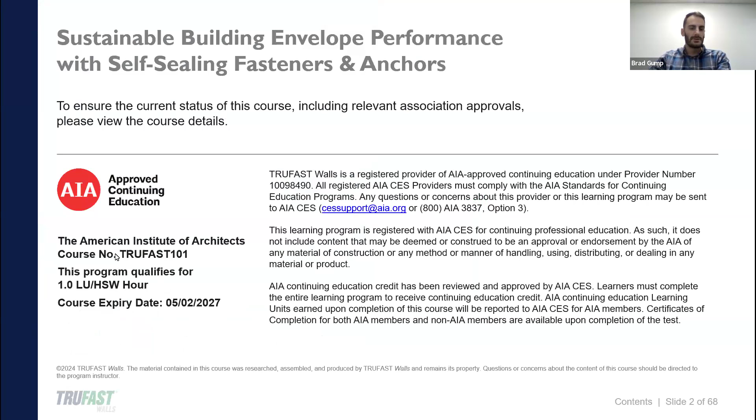The purpose and objectives for this CEU course today: sustainable building envelope demands high performance from proper installation of continuous insulation, and air, water, vapor, and control layers. So we ask a couple of questions. What happens when thousands of holes are made in these materials with blind fastener penetrations? The sequencing of these layers, how does that differ between subcontractors? How does that differentiate what products are used to install each layer? What sequencing issues can be avoided, and when can they not? We'll focus on how self-sealing fasteners can be used as a solution to these issues and help mitigate potential damage or inefficiencies in these types of systems.

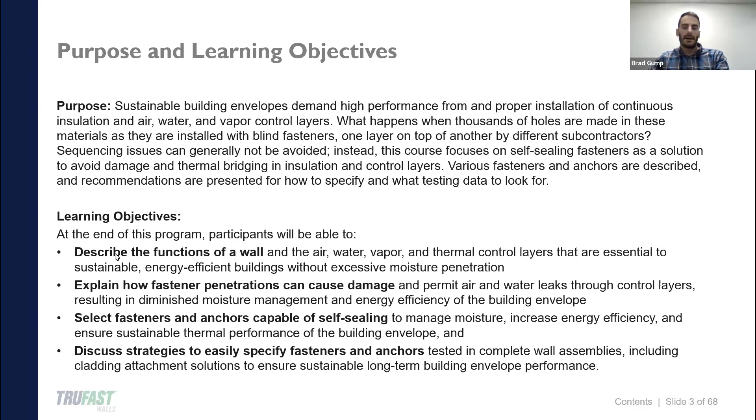The objectives we have today: at the end we would like participants to be able to describe the functions of the exterior building envelope wall, the air, water, vapor, and thermal control layers that are essential to these walls. Explain how fastener penetrations cause damage - they permit air and water to leak through control layers, resulting in diminished performance, whether through mold, rust, or decreased energy performance. Which fasteners are capable of self-sealing? What is the correct product to use if you want to manage moisture, increase energy efficiency by reducing thermal bridging, and similar things. Then we'll discuss strategies to specify these fasteners - how can I find these, how can I plug this into my specification and make sure on the job site that they are getting the correct product?

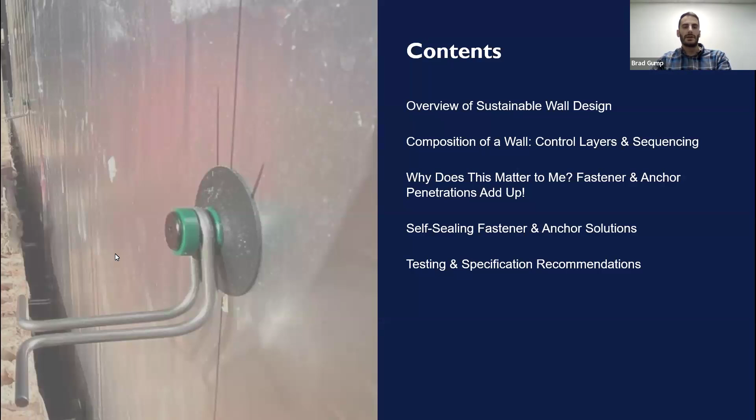So the contents: what we're going to go over is an overview of a sustainable wall, what we believe that looks like, composition of the wall, the various layers from the studs outboard. Why does it matter to you? Why should you be concerned about these fasteners and the penetrations? Self-sealing fasteners and anchor solutions - what is available in the market. And then the testing and specification of these particular anchors to make sure that they're actually doing what they say.

Walls serve three primary purposes. The most important function of all is structural. Structural support means that the foundation is able to support the structure's weight, and the walls are load bearing - that would be dead weight, so the structure can support gravity, it can support the roof over its head. Then we've got dynamic loads - live load is what that might be called. So that could be snow, seismic events, wind, rain, occupants, other things inside the building.

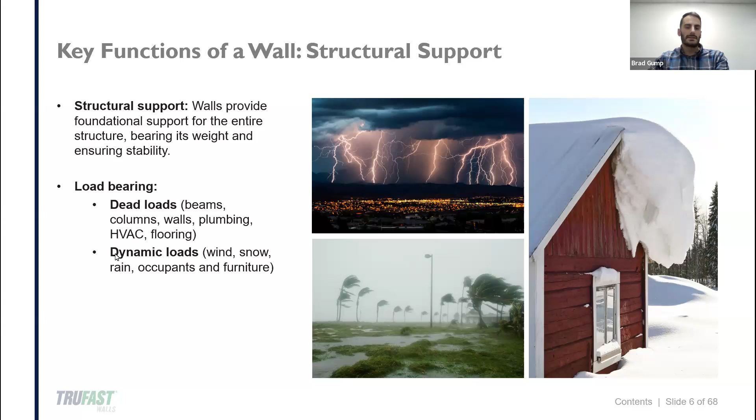The second key function of a wall is climate control, or energy protection. We use a lot of energy both heating and cooling our homes. The building envelope protects occupants and contents from the elements, and ensures that this conditioned air, whether cooled or heated, remains inside and is not able to escape, causing more use of energy, whether that be fossil fuels or electricity. Basically, it serves to keep the inside inside and the outside outside.

Also closely related to the wall's function to maintain climate and energy use is managing moisture. Water is a relatively damaging substance when you think about it. If it gets inside, it can rot wood, rust metal, it can do all sorts of things. So one of the key benefits of the wall is to keep air and water out. A properly constructed wall is one of the key aspects of sustainable building as well, helping to conserve energy while providing occupants comfort and healthy indoor air quality.

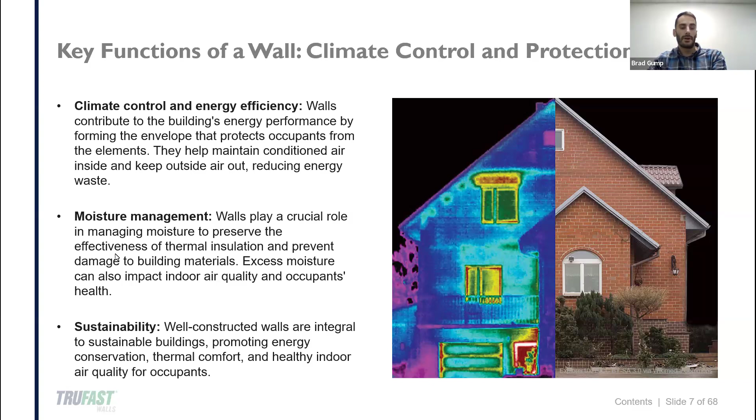And the third key function of a wall is design. This is purely for aesthetics, and it can do a vast majority of things, whether that be cultural identity, character, or just looks. People enjoy looking at buildings that are pleasing. They feel good when they see things that are aesthetically designed. These things can show the personality of architects and of the people that live in these cities, and show tradition and modernity. It's a cool way to express local personality.

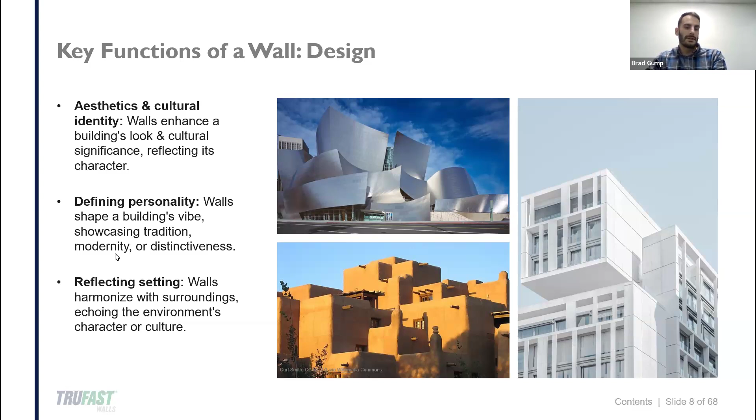So what are the essential components of a wall? I'm sure some of you are familiar with Joe Lstiburek, legendary building scientist. He came up with what he called the perfect wall. This wall consisted of a structure - that would be your studs, whether wood studs or steel studs. It could be like a CMU backup, something to support the loading of this wall.

The second would be the control layers - that could be for water, air, thermal, vapor. Think about your air and weather barrier, an air barrier, thermal insulation, things like that. And then the final layer would be the cladding. The cladding serves a variety of functions - that could be aesthetic, so it's the look, and it also serves to shed bulk water away from those control layers.

It is possible that some of these layers can be combined into one. So you might see your sheathing layer, your control layer be insulation. It could be the sheathing, and it could be the air and weather barrier. There are some products that will do multiple things and integrate into one.

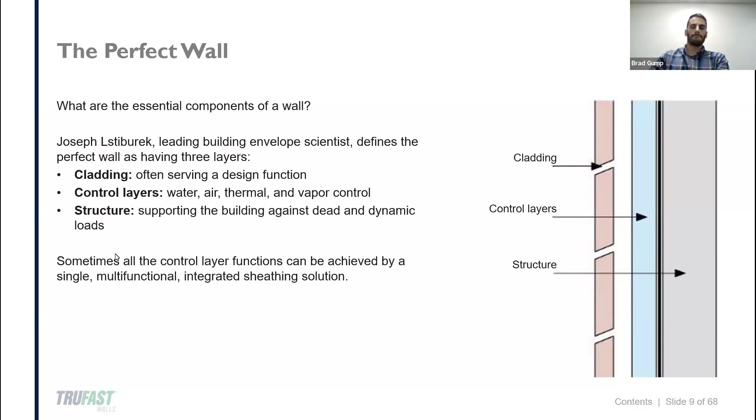Now we're going to break it down a little further, the way these multiple layers are sequenced - a lot of times there are multiple individual control layers. I'd say the most common assembly we see is going to be steel studs. You could have some sort of gypsum sheathing, you might have a sheet-applied or peel-and-stick air barrier over top, then you're going to have some form of thermal insulation - that could be polyiso, XPS, mineral wool.

You're going to have a cladding support system that could come in many forms, like a metal hat channel. It could be lath for stucco, it could be wood strapping like a 1x4. And then some sort of cladding is attached over top - it could be vinyl siding, brick, ACM panels, stucco.

What you might notice is that there are a lot of complex variables. You look at all these materials - are they compatible? How are they installed? What are their weaknesses? There are just so many complex options. You either think about it, there's hundreds and thousands of permutations of materials, manufacturers, and installation. So it's really something we have to be cognizant of when designing walls, to make sure the products we're using together are compatible.

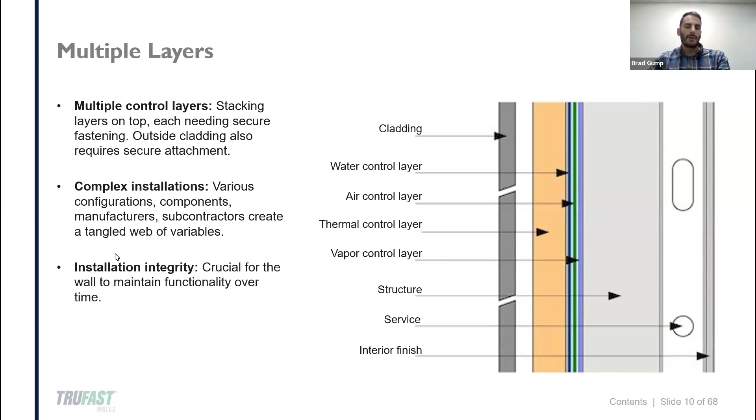So, fasteners and anchors. As a fastener manufacturer salesperson, we often find that fasteners are an afterthought in a lot of cases. People know that they need the insulation, they know that they need the barriers, but oftentimes they don't go so far as to think how the materials are attached and what the proper fastener is. This is a detriment in a lot of cases because fastening is very necessary.

It's something that you need to attach these layers, and if it's not done in a thoughtful way, if the proper products aren't used, you could cause damage to the structure and potentially the long-term health of the occupants. So they securely attach all these components to the wall, but unfortunately they do bring challenges, because a lot of these materials are designed to keep air out and stop thermal energy from conducting through the building, but they're creating holes - we're creating thermal bridges. So even though we're attaching this insulation structurally, we also have to be concerned about these thermal and moisture disadvantages.

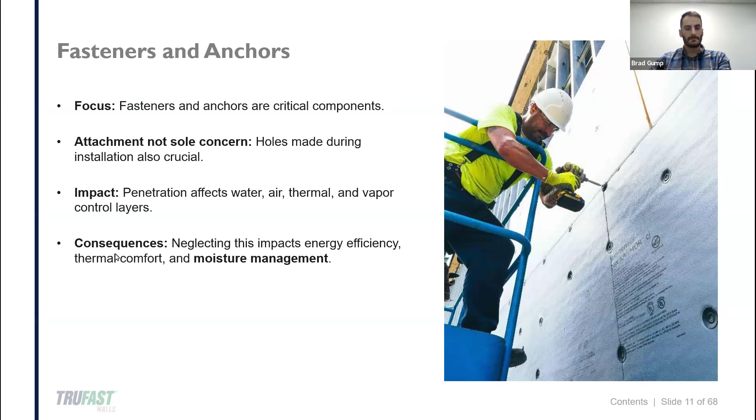So let's talk about the impact of moisture in the construction industry and how much of a problem it is. We've already noted moisture's impact on buildings - that can come in the form of rust or mold, degrading wood substrates, and also the health of occupants. If you have mold, obviously that is not healthy for humans to breathe in long term, so it's just adverse for humans.

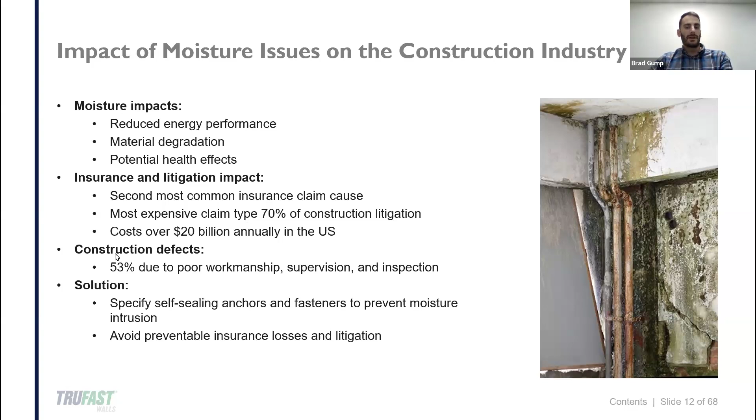So we have to make sure that we're mitigating water. Moisture issues also have a huge impact on insurance claims and litigation in the construction industry. Researchers found that water is the second most common cause of property insurance claims, and it is the most expensive type of claim, accounting for about 70% of all construction litigation and costing the US about $20 billion annually. The data also suggests that poor workmanship, poor supervision, and poor inspection of trade contractors during construction is the source of about half of these defects - people not paying attention, not using the right products, not taking care when doing these installations. So it's all very preventable. Specifying the correct anchors and fasteners is a way to help protect these penetrations, prevent possible litigation, and prevent moisture from infiltrating the building.

So that's a problem. What happens when the contractor shows up next and attaches this insulation over top of this otherwise perfectly installed air barrier? Whose responsibility is that? The air barrier contractor could install this material to a T, and then the insulation contractor says, well, it's not my job to maintain that, I need to attach the insulation. So who's on the hook for that? Whose problem is it?

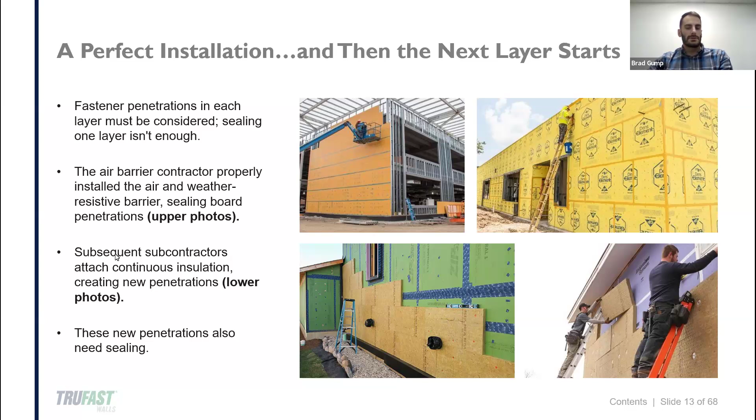So what's happening here is that these fastener penetrations over that air and weather barrier, from the insulation and cladding attachment over top, are basically just poking blind fastener penetrations through that layer, and there's really no way to treat those. Once the insulation goes up, once the cladding goes up, there's no way to access the air and weather barrier anymore to treat those fastener penetrations with some sort of tape or liquid applied sealant. So really the only option, if there was some sort of litigation, would be to remove the cladding, remove the insulation, and patch those holes, which is a big deal - that's a lot of labor cost.

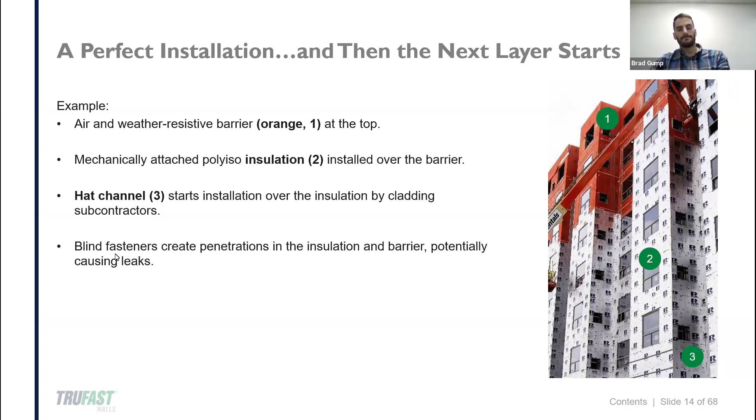Now let's talk about sequencing problems. That basically means the way in which these control layers are sequenced, the way they are installed. This project was built with an integrated product where the air and weather barrier plus the insulation product was included in one - basically a foil-faced polyiso.

When it comes to sequencing, you can potentially have leaks occur if different subcontractors are not considering how their install affects the layers previously installed before it. In this case, the insulation and weather-resistant barrier product was installed first, and then a hat channel system for a rain screen cladding attachment product was installed over top.

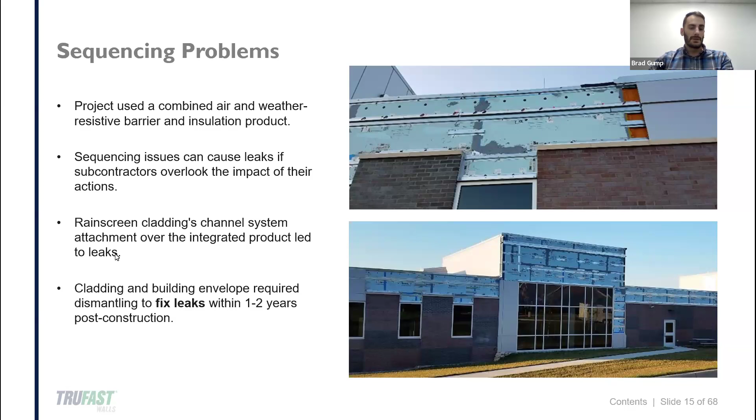Let's talk about some sequencing solutions. We've identified the problem, but now let's look at how we can fix that. In a majority of cases, as I mentioned before, continuous insulation is typically going to be sequenced after the air and weather barrier. That has to do with where the dew point is in your wall.

So the weather-resistant barrier is in most cases going to be put on before any other layer. Obviously this is problematic because those insulation and cladding layers, when installed over top, those fasteners are going to poke holes through it like Swiss cheese, and you just have thousands of opportunities for air and moisture to penetrate that building. A lot of times this sequencing issue just can't be avoided.

In roofing - the membrane goes on top, so there's really no issue with poking holes in that. But on walls, you have to put the cladding over top, and you can't put an air and weather barrier over top of the cladding. That would look silly.

So it's impossible to access or fix these holes behind the insulation and the cladding with conventional methods. The main solution here is fasteners, washers, and anchors that have been designed and tested to basically self-seal those penetrations behind the insulation and cladding to maintain continuity of the air and water barrier and support sustainable energy performance of the building envelope.

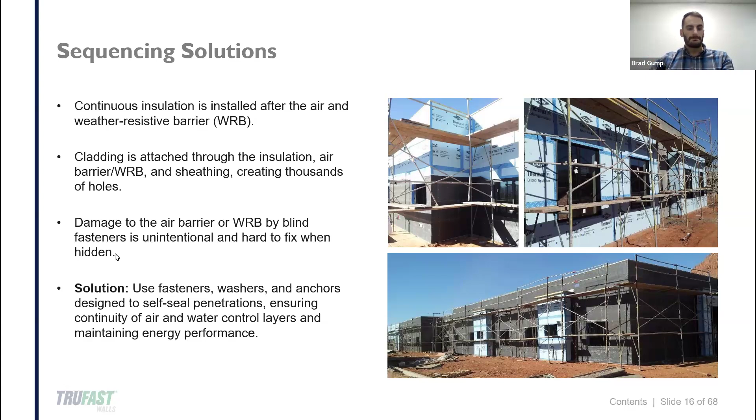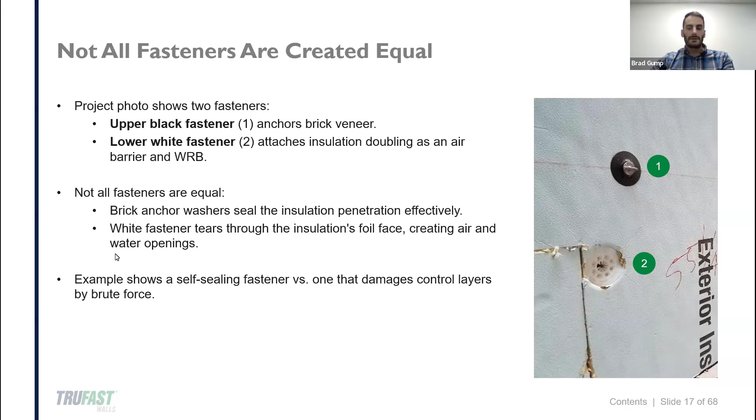All right, so I don't know if you're all able to chime in, but we just got a couple of quick questions. You don't have to necessarily answer in the chat, but just think to yourself: what issues can result when there are multiple individual control layers? What did we discuss before?

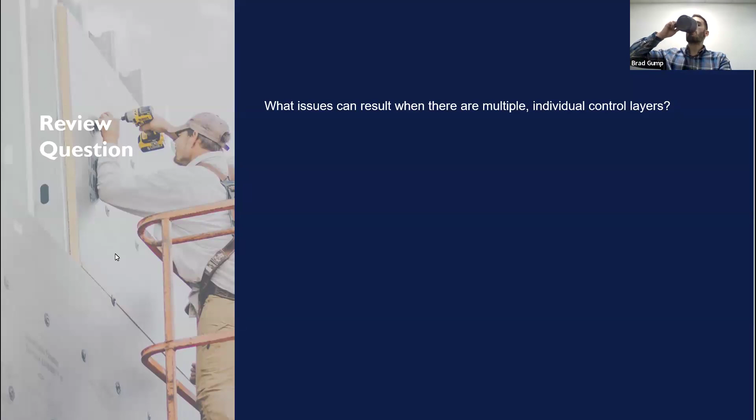So some of the issues that can result is when you have multiple layers. We just talked about the vast amount of configurations that are possible. You have different components, different manufacturers, different contractors. So it's a recipe for disaster almost, just looking at all these different things and how they can be assembled.

This creates a lot of problems, and assigning liability is difficult because, as I mentioned before, the air barrier contractor installed his layer perfectly, and then the cladding and insulation attachment subcontractors went and poked a bunch of holes in that. So who's responsible for that? A lot of times that goes back to the designer of record.

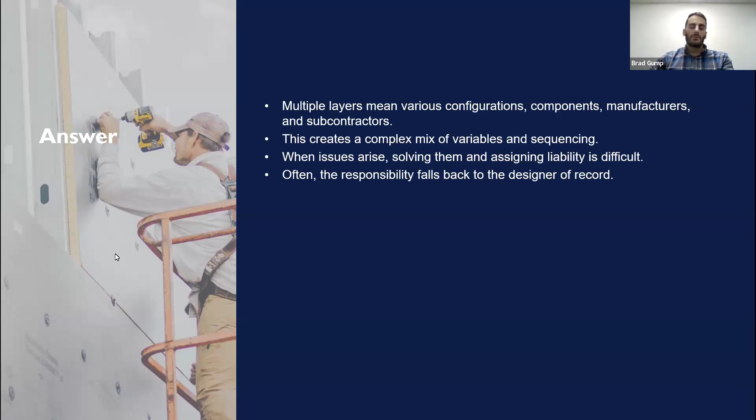So we often say that talking with building envelope specialists and consultants is a big way to go, because they know this stuff frontwards and back, and they can often assist with making sure sequencing is done properly.

So let's talk about the control layers and sequencing a little bit more. Just going to quickly run through this - I'm sure it's pretty basic knowledge for a lot of you. After the structure is applied to the building, typically it's going to be framed up, and you're going to use some sort of structural sheathing to support rack and shear, basically making sure your building's not twisting.

You get increased fire resistance, water resistance - some other examples. What you would commonly see would be wood, exterior gypsum sheathing, cement board, or magnesium oxide, which is a relatively newer product to the market, but still quite good.

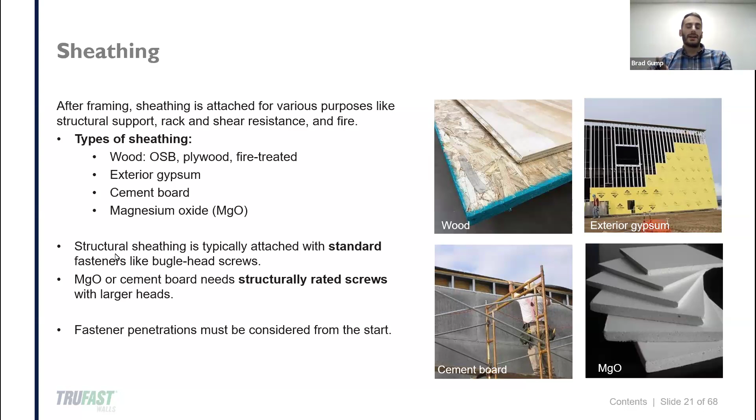These are typically just going to be installed with a bugle-head screw. In a lot of cases, the weather-resistant barrier is going to go over top, so there's not a huge sense in using self-sealing fasteners at this point in the wall. But note, right after this is when fastener penetrations become a consideration.

So then the next product that's going to go over top is the weather-resistive barrier. This is intended to shed off any bulk water that gets past the cladding, and any vapor. There are several kinds - typically wrap would be the first one, a sheet applied product that comes off a roll and is mechanically fastened.

There's also self-adhered, which would be like a peel stick - the roll has a release backer, and then it's adhesively applied to the building, so this would not use any fasteners. Then you've got fluid applied, which could be painted on, or you could use some sort of spray application to apply it as well, and again this would not use fasteners either.

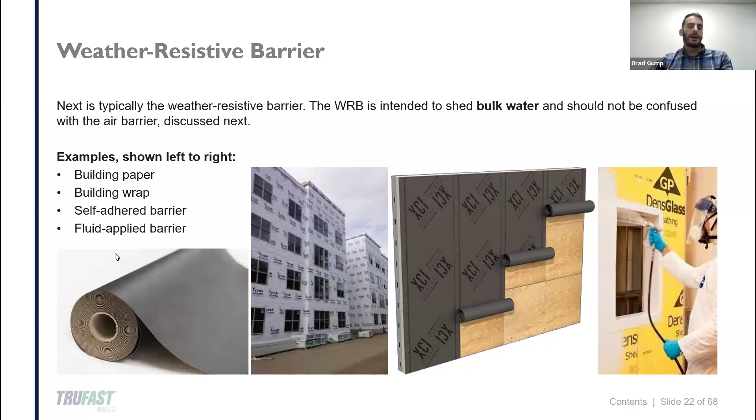So the next thing we're going to talk about is the air barrier, which requires a systems approach to control leakage into and out of the building envelope - so the integration of multiple...

I've heard MgO boards can be very corrosive, so stainless steel fasteners must be used. Can you confirm or comment on this?

Yeah, so MgO is only corrosive when exposed to water. So if the fasteners are detailed properly and flashed, you would not want to install a fastener into MgO and then leave the head exposed. You would always want to put some sort of liquid flashing over top of that head. As long as that is detailed properly, there shouldn't be any corrosion concerns, because water would never be exposed to the screw once that head is flashed. And if it is, you've got much bigger problems.

So I hope that answered that question for you. Thanks, I hope it did too. It makes sense what you just said.

Absolutely. So just getting back into this, the air barrier is designed to provide a continuous path of air resistance around the whole building. So what a lot of architects and engineers will typically use is a pencil test.

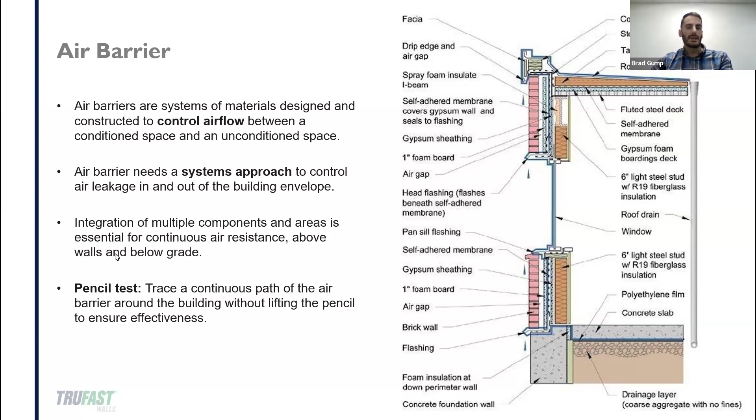This is a big sequencing issue too, because obviously the air barrier components that you would use on a wall are going to be different than what you would use on a roof, and then even different than you would use below grade. So this just kind of goes to show how important the sequencing and detailing is where these differing components meet.

So next we're going to talk about integrated sheathings with the air barrier / weather resistant barrier. This would be a component or a product where the sheathing and the air barrier / WRB are the same, and a lot of times this is going to be factory applied.

They might put some sort of waxy coating, a fluid applied air barrier, or some sort of hydrophobic agent used in the gypsum to prevent water from penetrating that. So these systemized solutions are really good.

They're good for labor because you're not taking two trips around the building, you're only taking one. The issue with these, though, is they do provide some more challenges when it comes to making sure these are sequenced properly and treated. So commercial applications might use fluid applied materials at the gypsum sheathing factory. You can kind of see all these dots over top - all these fasteners had to be treated since this product is being used as the air and weather barrier. So you do have a little bit of added labor cost there since these sheets are mechanically attached.

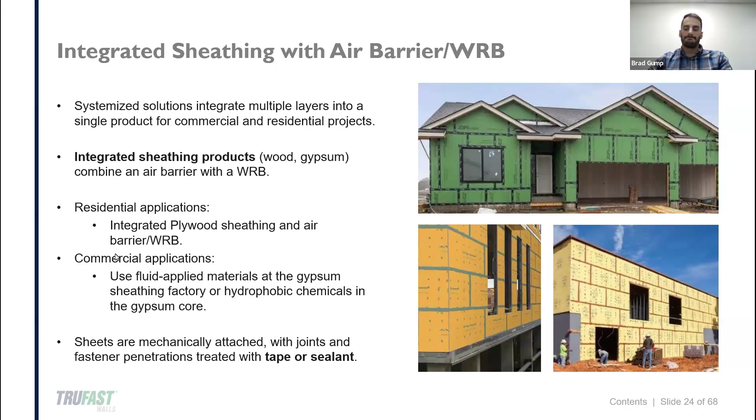So the next layer is continuous insulation. This is just defined as insulation that is continuous across all structural members without thermal bridges.

So to help people understand what that means - if you think about traditional 2x4 framing with open cavities and some sort of fiberglass insulation put in there, if you take one of those FLIR guns and point it at a house that's built like that, you can clearly see the framework of the wood studs being cooler, depending on the time of year, if it's being air conditioned. You can see that being cooler than the stud bays. This is because the thermal bridging qualities of wood are obviously greater than that of fiberglass insulation. So you're getting energy escaping through that conductive framing that kind of spans the wall.

So when we have continuous insulation, think of it like a coat - it's basically covering the entire shell of that building so that you're reducing thermal bridges greatly.

We've got a picture of just a koozie here. That's the fun way that we like to think of thermal bridging. You can kind of see condensation on the top of that bottle there, and it's reduced when you use thermal insulation because the dew point is pushed further outside of the surface of the can or bottle.

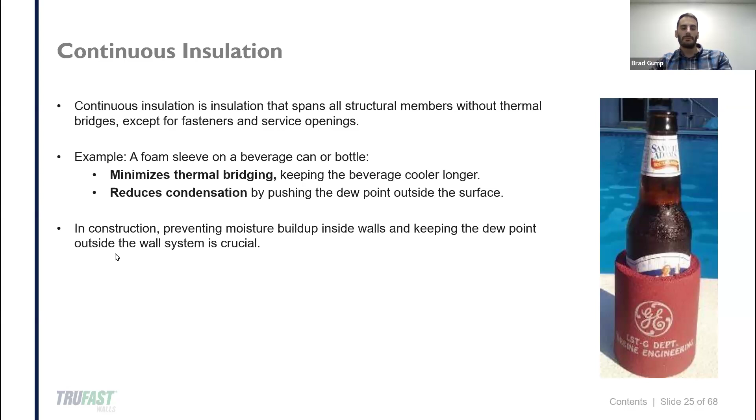In relation to construction, that is very important to prevent the buildup of moisture inside walls and prevent the dew point from occurring inside the wall system. Because if you don't detail that properly, the dew point could potentially be where your fiberglass insulation is, and then you're getting moisture in there, which doesn't really have the ability to get out. So you're going to cause mold and mildew and things like that.

So this is kind of the image I talked about earlier of a traditionally framed home. You can clearly see those studs are experiencing more heat loss than the stud bays.

So a lot of energy codes in America are now requiring continuous insulation. Specifically, commercial buildings is where you see most of the continuous insulation being codified, but you would also start seeing it on a lot more residential construction moving forward. This obviously depends which climate zone you're in - this is going to be primarily geared towards people in the northern United States, but I'm sure it will start branching out to the more southern states as well.

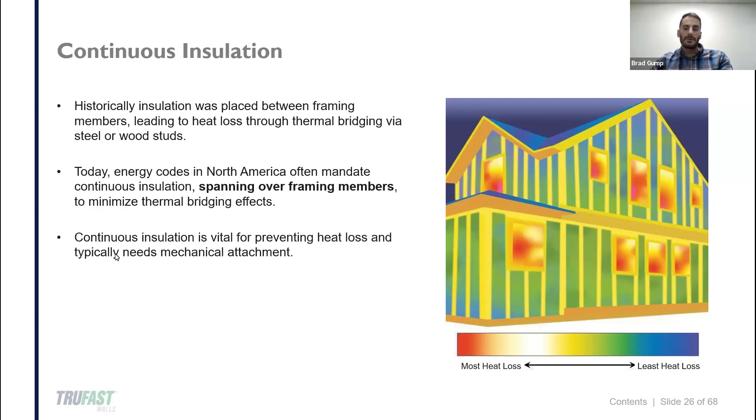So the most common types of continuous insulation that we see: expanded polystyrene. It used to be one of the more readily available products. You'll see that if you're using an EIFS system. It's not the best insulator - it's vapor permeable, but it is pretty cheap. So you might see that on more tract style homes.

XPS is quite moisture resistant. It can be flammable, so some considerations have to be taken there. But that's a good product - it has a fairly decent R value and is readily available in a lot of home stores and things like that.

So polyisocyanurate, or polyiso, is a blown foam. This can be used when it has a foil facer or some sort of facer on top, like you see in this picture here. It can be used as the air and weather barrier, as well as the insulation.

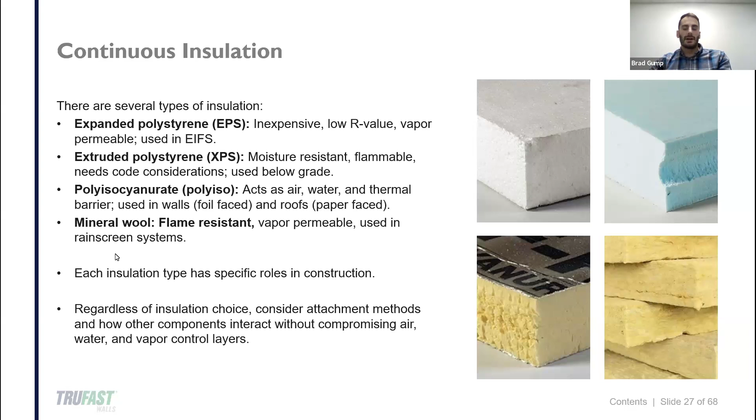It is a little bit more expensive, but it does have a really good R value. The last insulation we typically see is mineral wool. This material has taken off in popularity in the last few years, mainly because of its highly flame resistant qualities. It's vapor permeable, and it allows itself to drain and dry. It doesn't have quite as high an R value, but it does have sound attenuation properties as well. You'd see this a lot in rain screen type systems that you want to ventilate and dry. Each one is different, so there might be strengths depending on what your building needs and what you're doing, where one would make sense over the other.

So talking about integrated sheathings with air and weather barrier and insulation. Structural sheathing, air barriers, WRBs, and continuous insulation in combination is an example of creating a systemized board solution. It just helps to reduce labor and increase performance. No matter the configuration, the fasteners always have to be considered.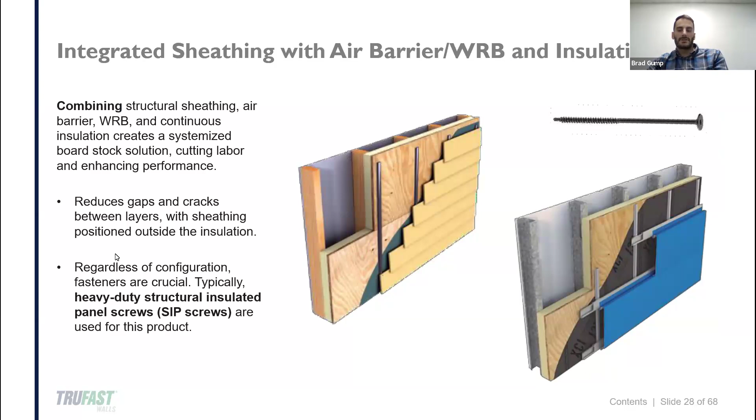Lastly, let's look at cladding and some various types you might see. Lath attachments for stucco or stone veneer typically require a fastener every 4 to 7 inches vertically and 16 inches horizontally, since many fasteners are required to attach lath to support its relatively heavy cladding weight. Metal panel rain screen systems require mechanical attachment as well through all the control layers, for that girt and rail or channel system, as people might call it. Then we've got tile, granite, other stone type claddings, brick, things like that that are very heavy and call for specific engineered anchors to secure that cladding back to the structure.

Apart from EIFS, most cladding requires fasteners or anchors to mechanically attach the layers. EIFS can typically be installed with adhesive because it is so light.

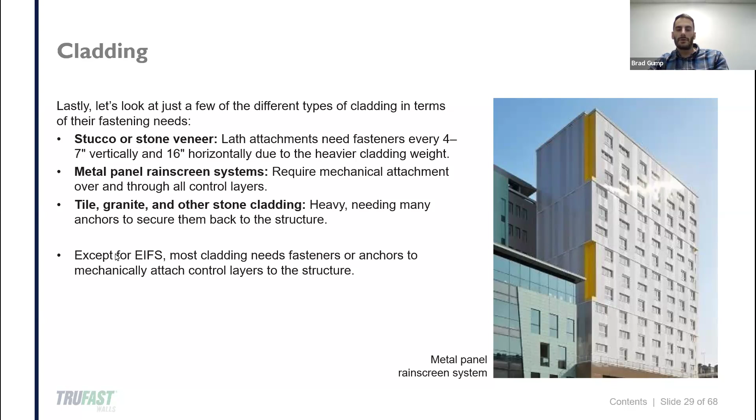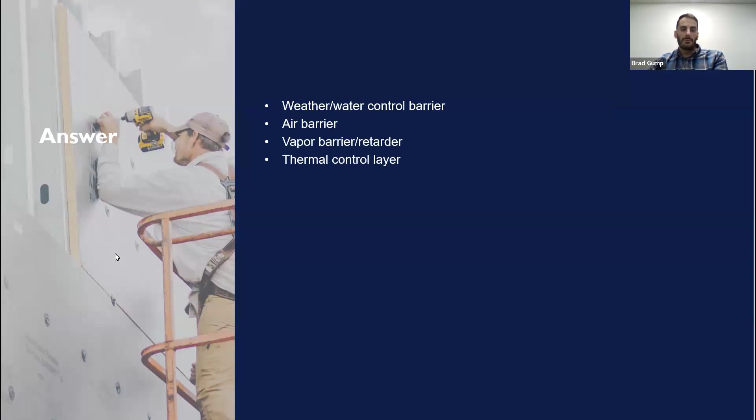Just another question to think about amongst yourselves: what are the critical control layers for sustainable wall design? We've got the WRB, air barrier, vapor barriers, and thermal control layers.

Now let's talk about why this is important to you and how these things add up. So we talk about the impact of fasteners and anchors. I had mentioned before the damage that moisture intrusion can cause on building materials, how it can reduce energy performance and harm the health of occupants, and just the potential cost of construction litigation.

Let's do an exercise to help us understand the amount of penetrations you would see when constructing a full building envelope, scaled down to a single 4x8 section.

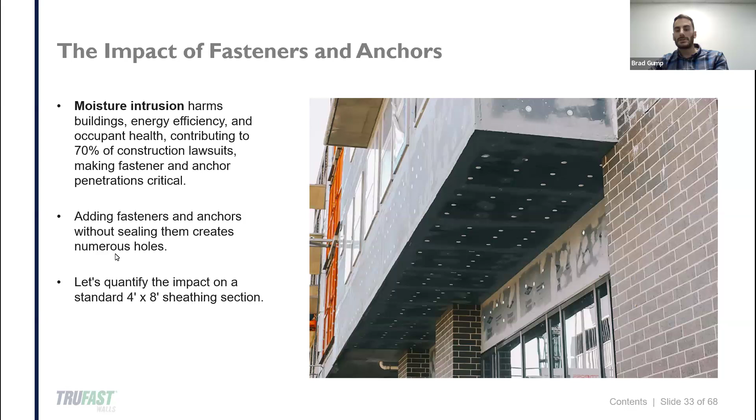Let's talk about how these all add up. We're looking at the first layer that would be installed, which is a gypsum sheathing panel. Typically these are installed with screws every 4 inches around the edge, and then every 8 inches in the field. Depending on where you are in the country, and if there's a high wind load requirement, you could see up to 92 fasteners for a single sheet of gypsum.

Next, let's think about a mechanically attached building wrap that goes over top. The typical fastening pattern for this is 16 by 16, which comes out to about 28 fasteners per sheet. So we're already up to 120 fasteners in that small area, and we've only done half of the components.

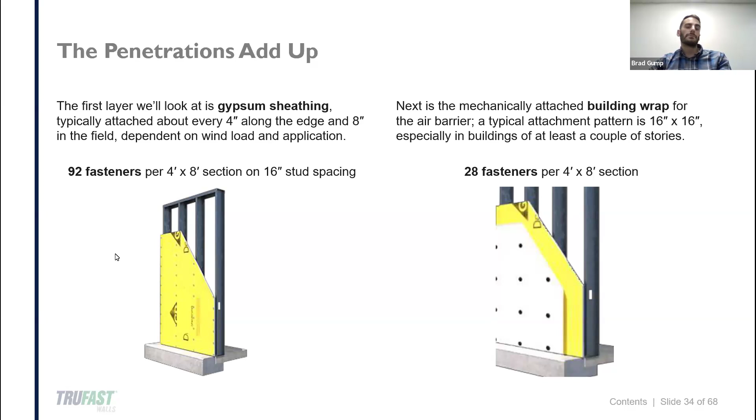Next, we've got to install our insulation. It really depends on the material and the manufacturer's fastening pattern, but an industry standard for a foil-faced polyiso is going to be 28 fasteners per 4x8 sheet.

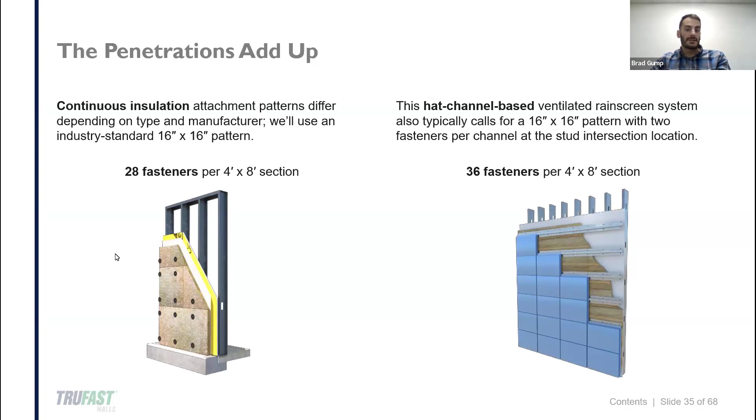Now we'll consider some sort of hat channel-based rain screen system, like a metal channel. These are also going to be about 16 by 16 inch, and you also have to use fasteners at the stud intersection locations, so we're looking at about 36 fasteners per 4x8 sheet. If you're following along and doing the math with me, that's a lot of fasteners - that totaled up to 184 fasteners penetrating through all these specific control layers, and typically different subcontractors are going to be involved at every stage here.

A lot of contractors will say, well, I have my responsibility, that's to install the insulation or the cladding, and whatever happens to the other components is really not my job. And that's a fact of the real world.

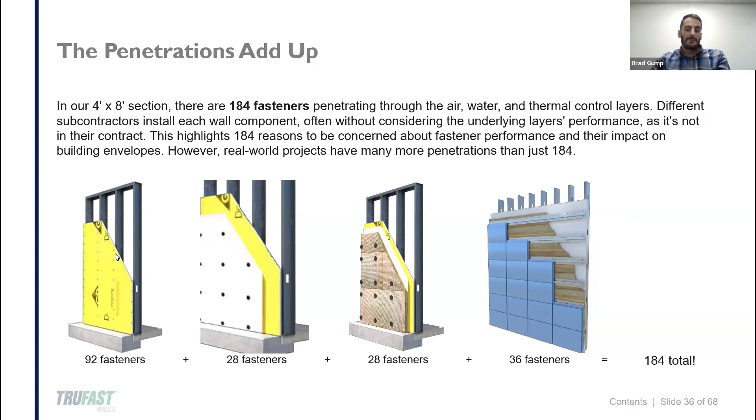If you think about a small neighborhood Aldi grocery store, just looking at their simple building envelope design, it's made with a single integrated component. This would be a foil-faced polyiso material installed directly to the steel studs, acting as the thermal control layer and the vapor control layer, and they've elected not to use sheathing here. For an average size store, that's about 4,000 fasteners to attach the insulation, and about 6,000 fasteners to attach the brick veneer. So that's 10,000 fasteners poking through this control layer for one grocery store.

You have to think, wow, if there's 10,000 opportunities for air and moisture to get into this building, just think about, on the scale of the whole United States, how many opportunities there are for air and moisture to get into these buildings. And even further, how many buildings constructed in the past 30 years have severe air and moisture infiltration issues that we're not even aware of.

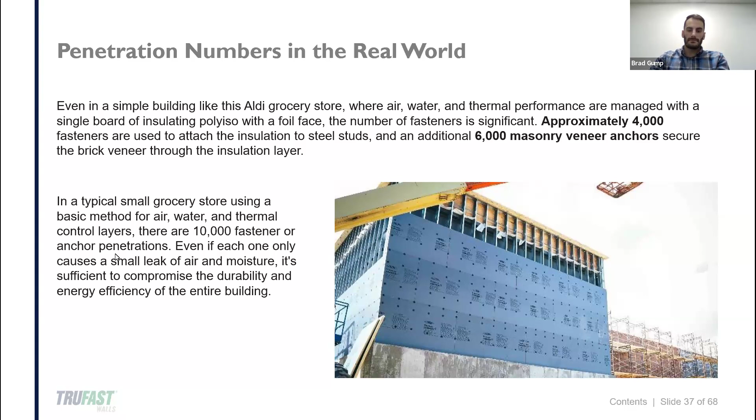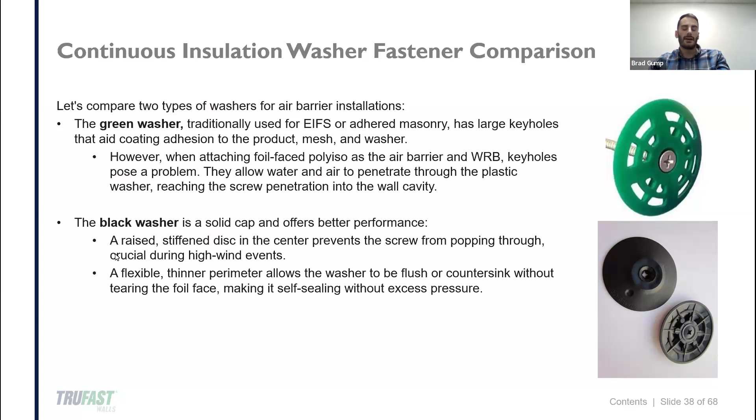If you look at this washer on the bottom, you can see it's purposefully designed where the perimeter is smooth and it has a solid cap. You can see these cross hatches on the underside of that washer, which helps it be flexible. So when you're installing it onto the insulation, that perimeter actually flexes as you're driving the screw, so as not to tear the insulation and make sure it seats properly.

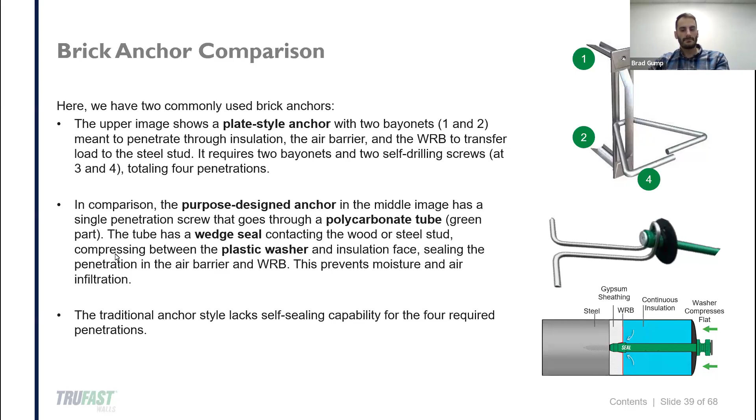So, as I just talked about, there's thermal bridging. Think about a standard cast zinc barrel, which is highly conductive, versus polycarbonate with a thermal break, which is going to be significantly lower in conduction. So you're going to see a lot less heat loss through the building. We'll show you in this next slide what that looks like.

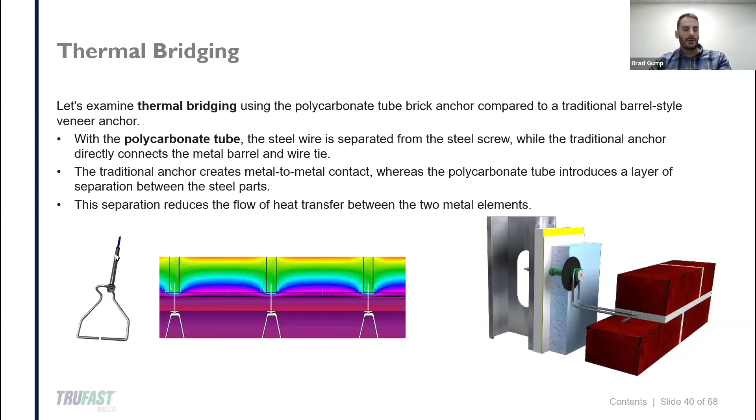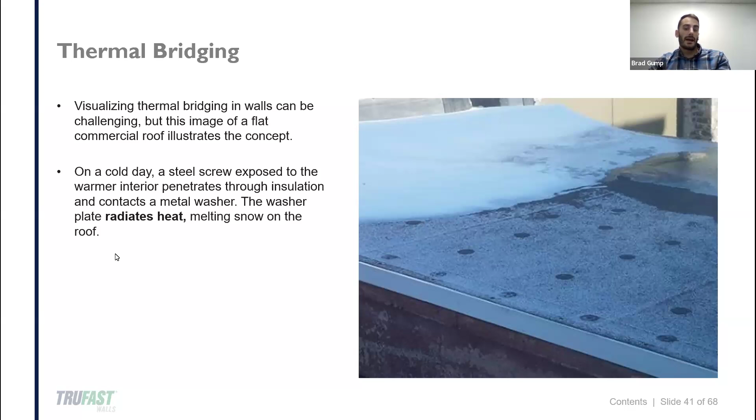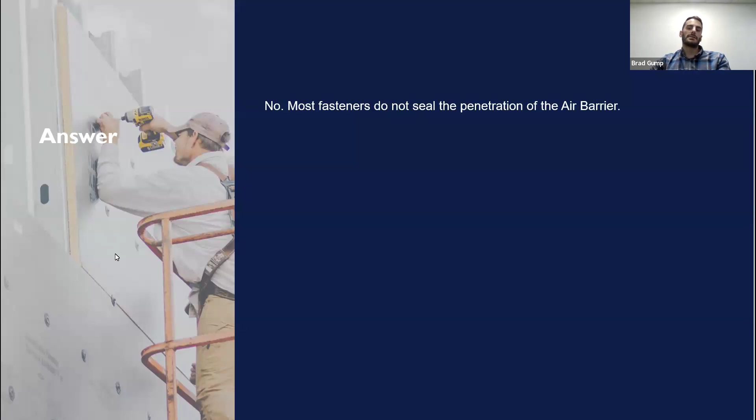Review question: are all fasteners the same? No, they're not. Most fasteners do not seal penetrations of the air barrier.

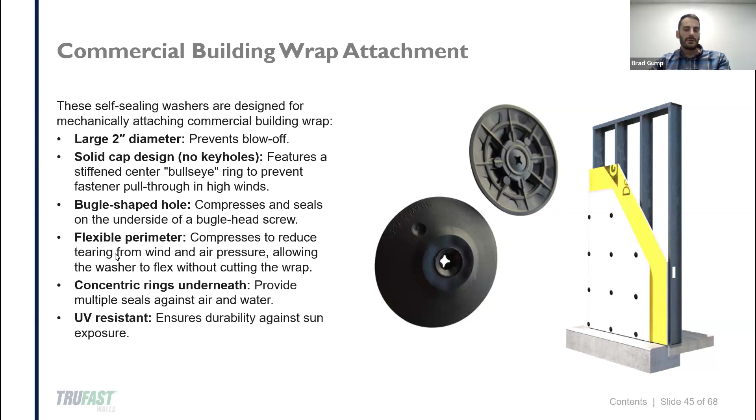Let's now talk about self-sealing fastener and anchor solutions. We briefly touched on this product before. Typically for a sheet applied membrane, you might see cap nails or staples used. Those aren't great products because they don't provide a lot of blow-off resistance and they can corrode. If you use a high diameter washer that has a flexible perimeter and doesn't tear the material, you're going to get a much better seal of that sheet applied membrane than with almost any other product.

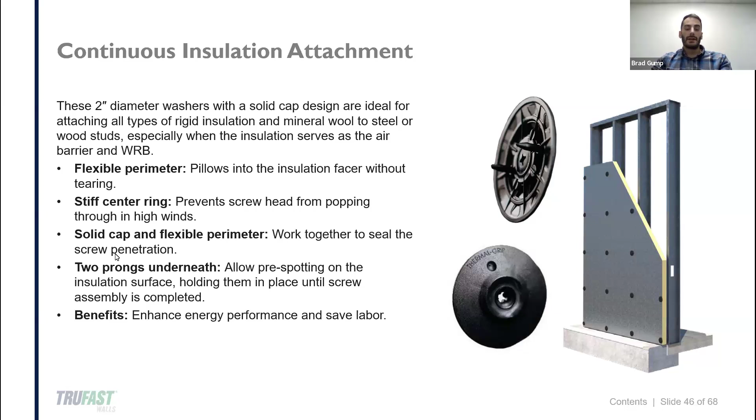Similarly, this looks like the exact same product, but you'll notice these two prong features that stick out of the bottom of the washer. It still has that flexible perimeter, so it won't tear the foil facer of the polyiso insulation. It's also got a stiffened center ring, which helps prevent overdrive, because as you drill that fastener in, if you hold down the trigger, you could blow right through the insulation. That stiffened center ring helps resist that and prevents the screw head from popping through in high winds. The prong feature lets you pre-spot it on the face of the insulation, so you can poke the washer in and it'll stay there for rapid installation.

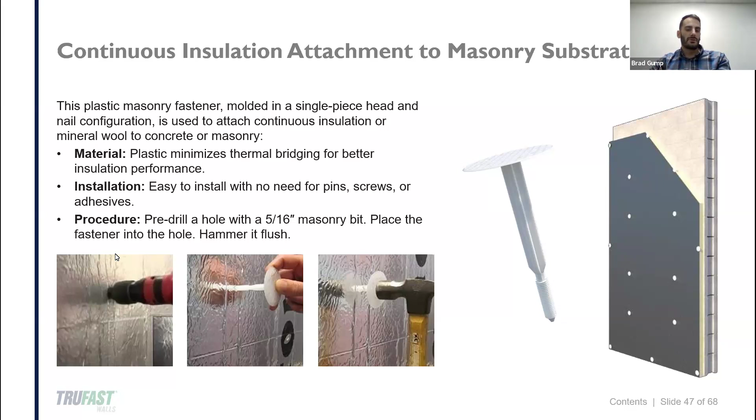If you're attaching insulation to a masonry substrate, whether below grade in a crawl space or the underside of a concrete deck, you could use a product like this. You'd pre-drill through the insulation into the substrate, insert the anchor, and tap it flush with a hammer. This is a fully plastic insulation anchor, so it minimizes thermal bridging. You don't need any pins or adhesives that might have setup issues in cold conditions.

Another good product for insulation attachment is a shot-in style pin. You can see in this cutaway that the pin recesses down into the choke of the fastener, so the thermal bridge is basically pulled away from the face of the insulation, making it more difficult for thermal energy to transfer. A lot of these solutions are shot in with tools, so they're quick and very efficient for insulating the structure.

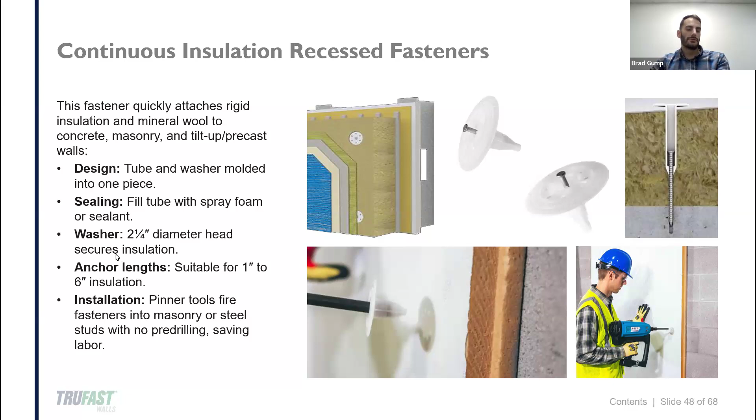The next product that's really cool for these applications is a newer category of fastener, typically referred to as tube sealing fasteners. It combines a screw, washer, and a tube to aid in sealing those blind fastener penetrations at the layer of the air barrier or WRB behind the insulation or cladding. In these lower images, the one on the left shows what happens if you drill a screw to attach insulation directly - as the screw spins, it tears up the air and weather barrier.

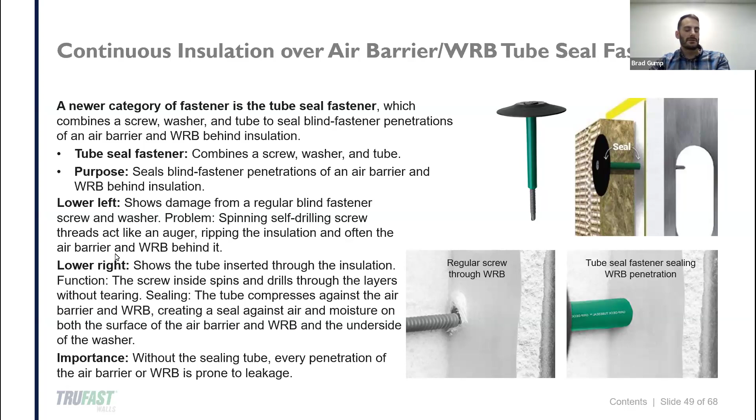You have quite a large hole, bigger than the screw itself, that air and moisture could be allowed to pass through. Now, when you take this tube sealing product and fasten that insulation down, that tube is actually going to compress over the screw penetration it just made in the WRB and essentially seal that out, so air and moisture are not allowed to pass through. This is a really cool product because you wouldn't be able to treat that blind fastener penetration any other way.

I had talked about this product briefly before. This would be like a masonry cavity wall anchor that combines that sort of tube seal technology. So it has that sealing technology via the wedge seal, but it also has thermal bridging resistance as well.

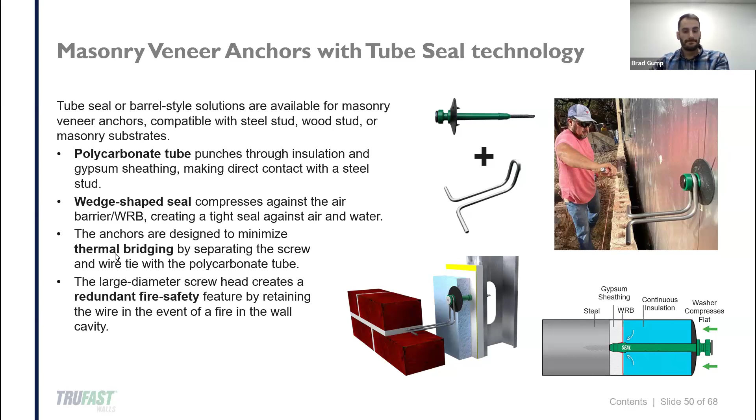We can also use this tube seal product not only for insulation attachment, but attachment of cladding systems as well. This particular product has been combined with a metal washer, as opposed to a plastic washer, for installing expanded metal lath to receive a stucco coating. So you can use that 2-inch plastic washer to install your sheet-applied air and weather barrier, install the insulation with the plastic washer tube seal, and then install your lath for stucco with the metal washer tube seal. You can really seal all layers of your wall with some sort of sealing technology, using a belt-and-suspenders approach to make sure that's sealed.

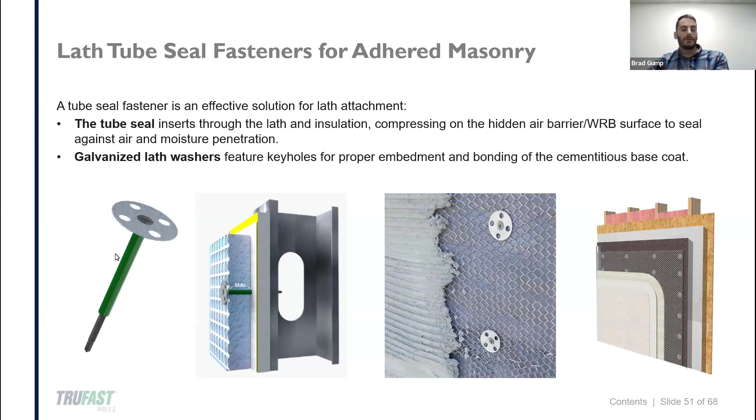Next we have rain screen hat channel tube seal fasteners, for something like an aluminum composite panel or metal panel. You can attach the hat channel with these tubed fasteners as well. Notice it doesn't have any sort of washer on there - the tube basically just butts up to the head of that screw. There are pre-punched holes in this channel so that when the screws are fastened through to the structure, that tube is compressed on the channel and serves to keep water out of the head and out of the fastener penetration underneath. It also helps resist thermal bridging because you're breaking the metal-on-metal contact between that channel and the screw.

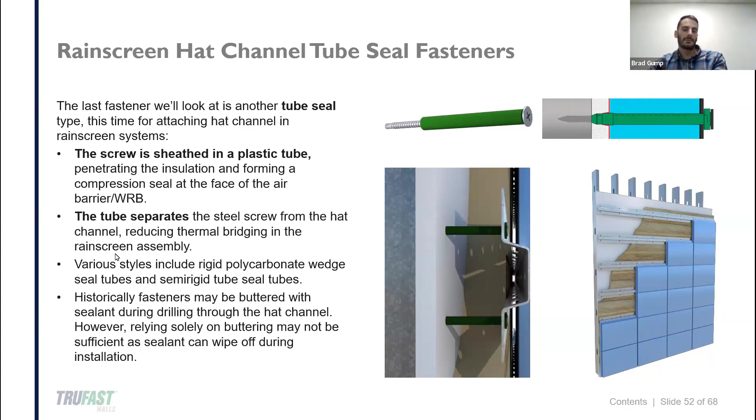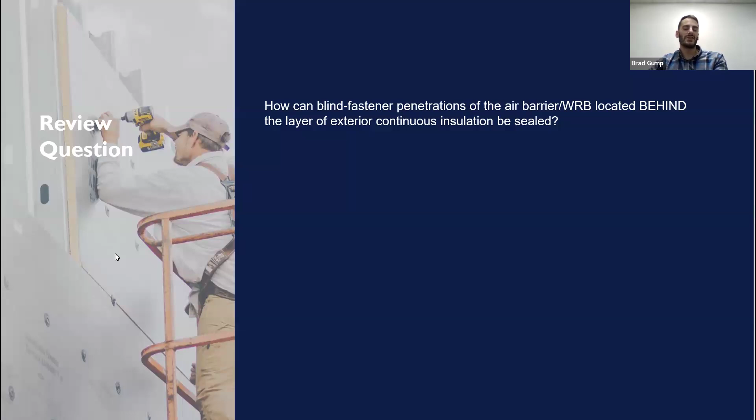So how can blind fastener penetrations of the air weather barrier, located behind the exterior continuous insulation, be sealed? This is basically just using those purpose-designed tube seal fasteners to attach the insulation and any other layers to help seal out the penetrations.

So testing and specification - testing is incredibly important. If you're not testing, you're guessing. You could use a fastener that's been buttered, you could try some sort of tape, you could squirt sealant in. Those options may work, but they've really never been tested. You don't know if those things are going to do what you hope they do. So testing is a very key element.

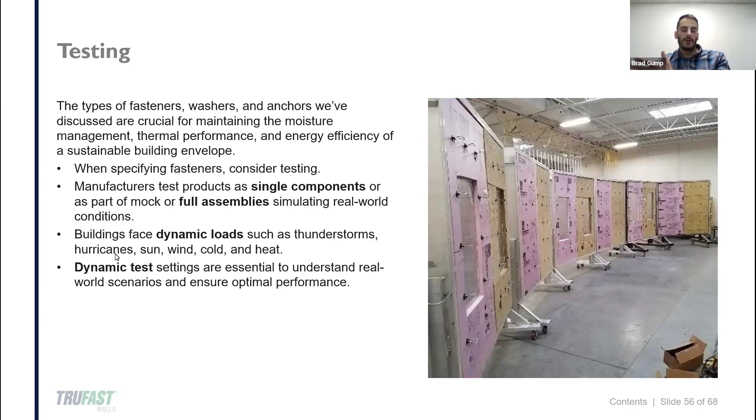in the management of moisture and thermal performance when it comes to these walls. A lot of manufacturers will test their products as a single component, but what happens more often is an assembly test that simulates real world conditions and how things are in the field - like having loads exerted on them, going through thermal cycling, receiving air and water under pressure, to really see how these fasteners hold up and seal out the air and moisture. The two main tests a product like this would go through would be ASTM E331, the test for water penetration, and E2357, the standard test methodology for air leakage.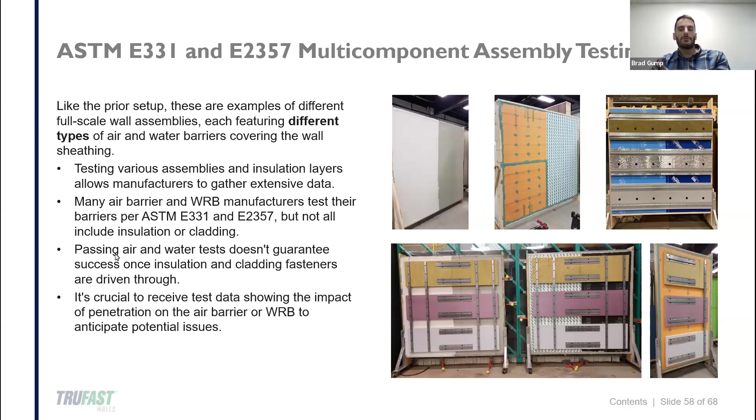We're using different air barriers and different insulations, just to make sure that we're accounting for all those sequences and potential variables on a job site, to make sure that under all conditions these products, whether extruded polystyrene or polyiso insulation with brick anchors, perform. Top third in this particular picture, we've done lath attachment on the bottom, and then we have a hat channel. So the way we tested this was we built this buck, with water spraying and pulling through the backside of the system. If any moisture appears on the backside of this wall while it's being monitored, that would count as a fail, and the product would not be rated to either of these standards.

Manufacturers who take their testing to extremes are very admirable. They go above and beyond the standards, trying to pass conditions significantly worse than the minimum, just to make sure their products are top tier.

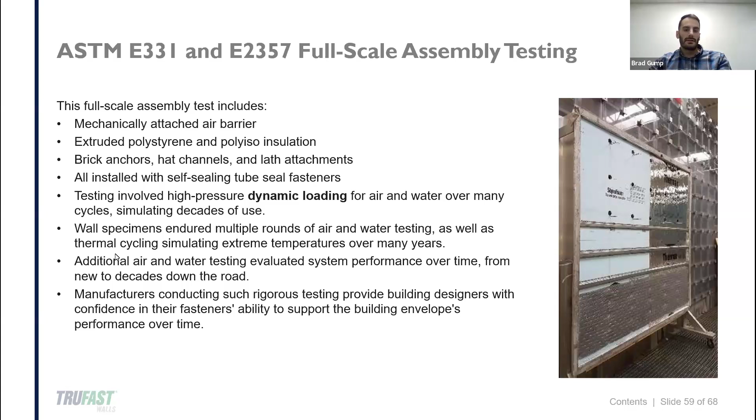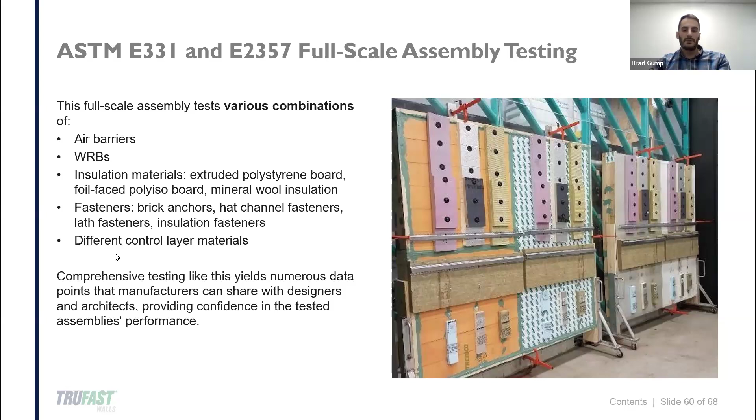This full scale assembly was kind of referred to as the Frankenwall. It's got a lot of different variations, a lot of different combinations of fasteners, WRBs, and insulation, and was tested to both E331 and E2357. These comprehensive testing methods provide manufacturers with a myriad of data points so they can pass on to designers and architects confidence that regardless of the assemblies they're specifying, this is going to perform.

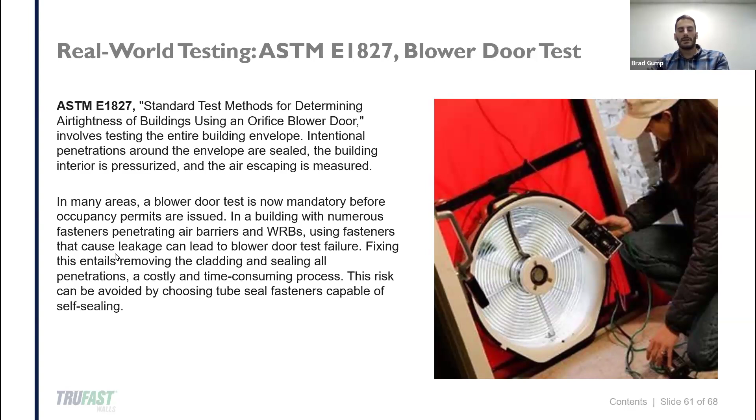Looking at specification of these products, how are they found? A lot of times, as I mentioned when we started, fasteners are often overlooked, and it's left up to the subcontractor to basically supply what is available or most easily accessible - whatever they have left over in their truck from the last job. Oftentimes that's not going to be the right product, so specifying the correct product up front, so that it's well known what needs to be used ahead of time, is critical.

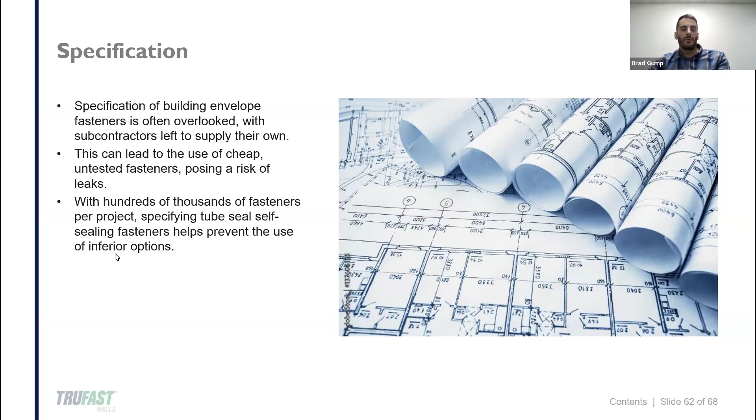A lot of the ways these products can look to be specified, there's a lot of tools out there - MasterSpec, SpecLink, Specs for Us. Not that I'm plugging any of these services, but these are just easy ways that streamline the specification process and allow you to search for fasteners like this that self-seal and prevent thermal bridging and things like that.

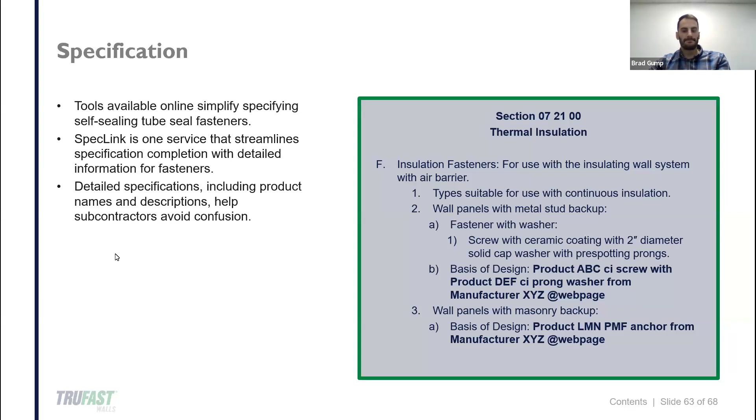Tips for success: looking at creating a high performance and sustainable building envelope, it's just about hiring building envelope consultants in the early stages, just to help understand sequencing, material dissimilarities, how to use the proper fasteners, detailing things like that. And just using smarter attachment solutions like these tube seal products that we had talked about, just to prevent air and moisture penetration.

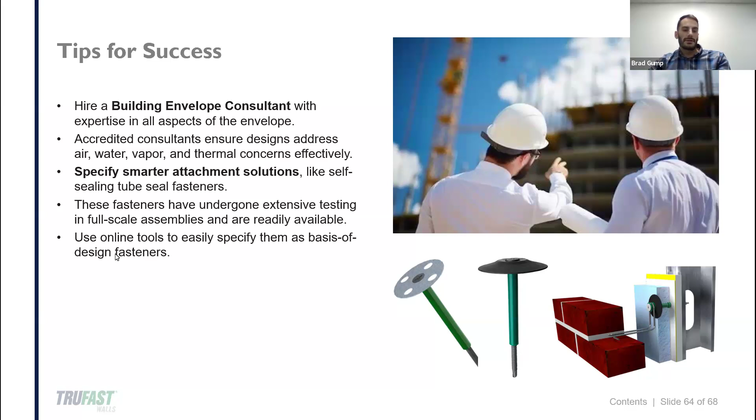The takeaways I want to talk about: proper installation and performance of continuous insulation and air, water, and vapor control layers are essential to allow buildings to perform efficiently and free of excessive moisture. When hundreds of thousands of holes are made by blind fastener penetrations in these layers, that can result in diminished capacity and performance, and potentially cause damage to occupants' health. Tube seal fasteners ensure performance of sustainable building envelopes, and without sealing tubes, every penetration is susceptible to leak. And lastly, fasteners, anchors, and cladding attachment solutions tested in complete wall assemblies are the easiest way to ensure sustainable long-term building envelope performance.